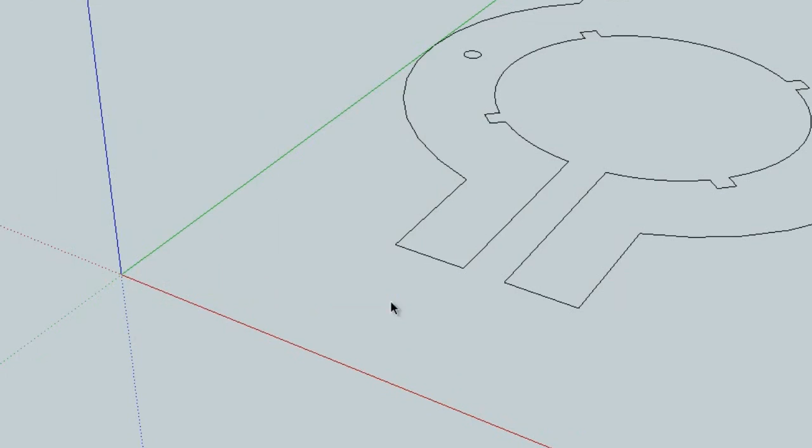Alright, so this is the mount. This is the bottom router mount, and this is the vacuum mount that we have. So I'm going to convert this into 3D, so let me see if I can do this a little bit easier.

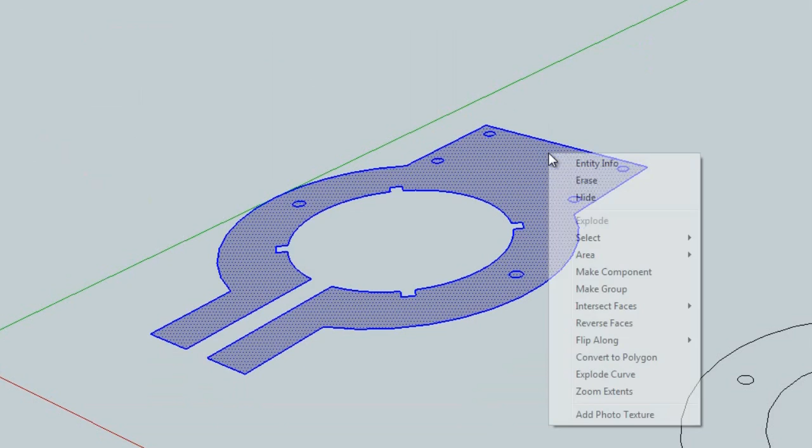I'm going to intersect everything in here. Selection, so I should have these as separate. Okay, so I'm going to erase these little inside things, because these are holes that go all the way through, right? Mm-hmm.

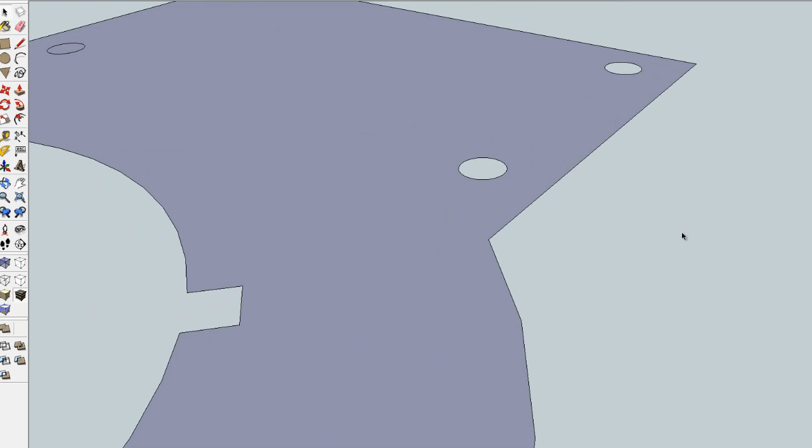And then how thick is the wood? 3/4. Okay, so what we're going to do is we're going to make this 3/4 inch, right?

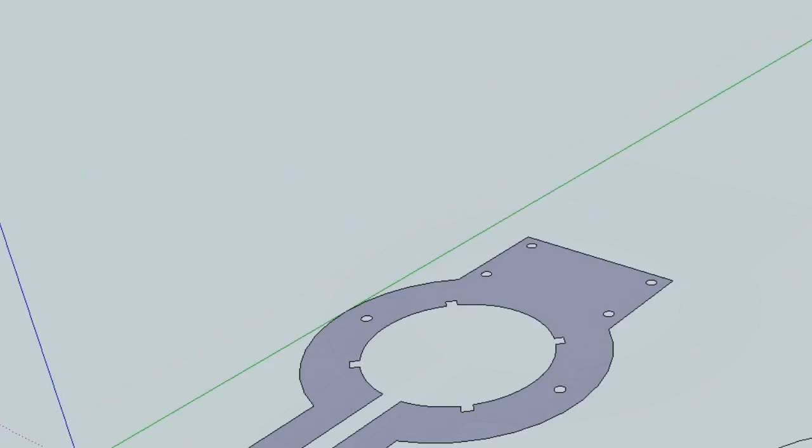Uh-oh, we have an issue with scale here. So what we need to do is we need to scale. So we're going to go 1/12, 0.083333, 3 repeating. It looks a little small, but we'll find out.

So let's go 3/4, 0.75. Yep, that's the correct scale.

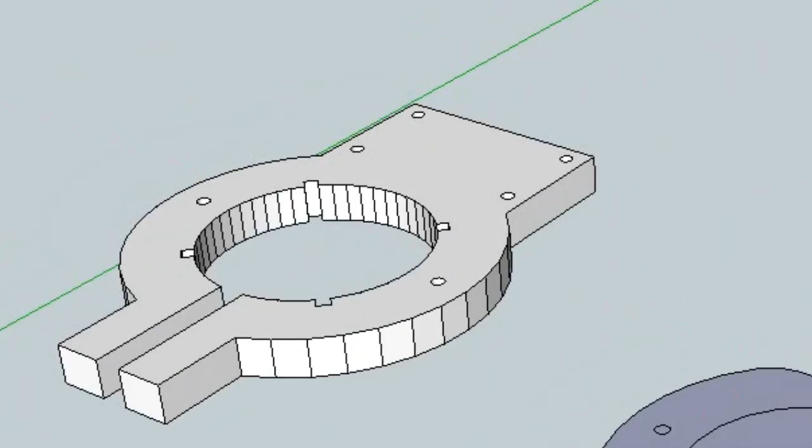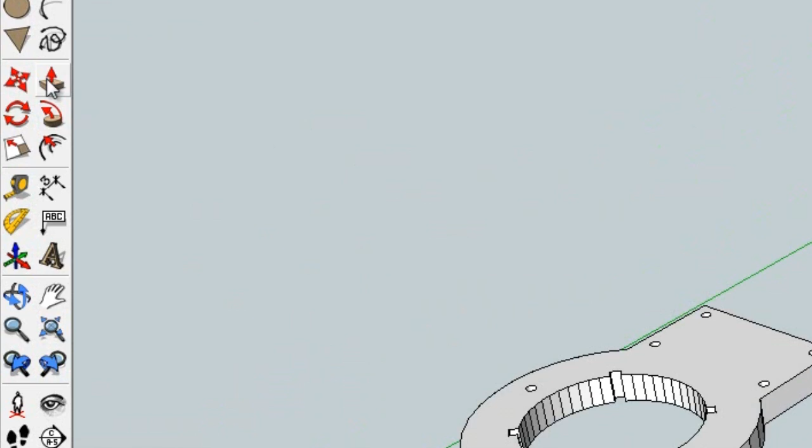Okay, so we need to do the same thing with this one. What I usually do is when I just do one line here, it seems to work, but I could have just created a large plane around it. So let me cut out the hole, but I need to intersect everything that's inside of it. Intersect with the selection. Cut out that hole, this hole, and this hole. And then I'm going to extrude it up 0.75, which is 3/4.

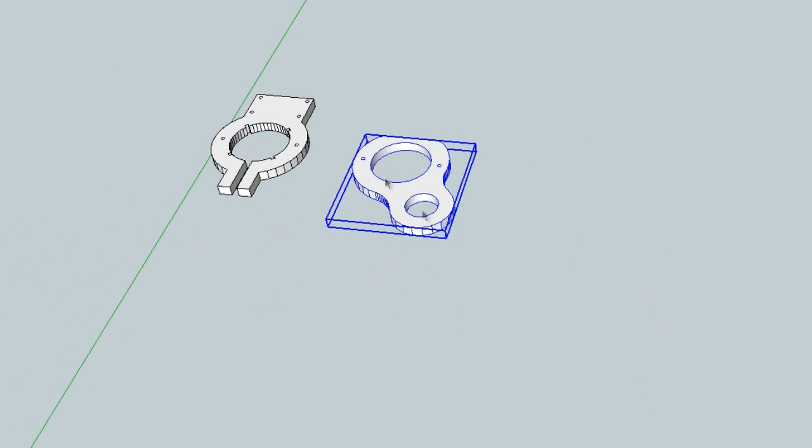Okay, so now we have, I'm going to make these into groups. Make a group. Okay. And this is a group as well. So now we can essentially modify things.

Alright, then we're going to create the router inside. Okay, but we're only going to go make a cylinder that goes 0.75 inches below. Yeah. Okay, so...

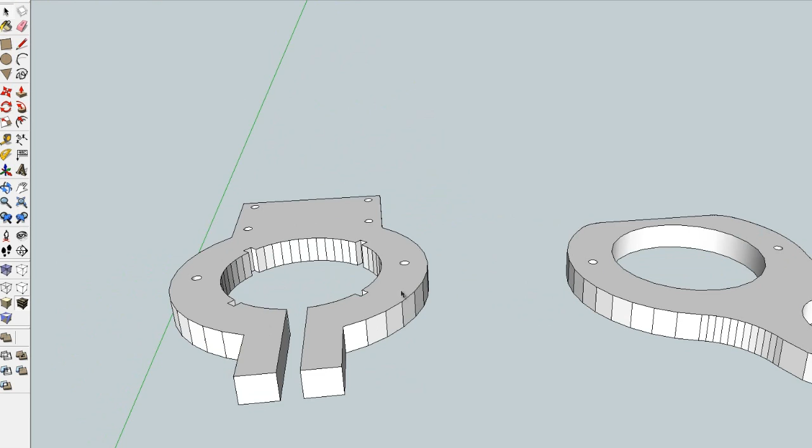Let's move this on top like it should be. We're going to move it. So this hole down here meets with the other hole, right? Mm-hmm. There we go.

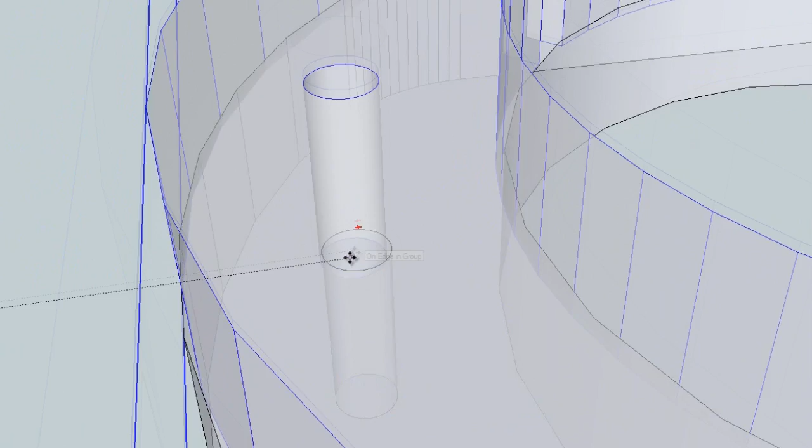Okay, so now we have the configuration, right? Mm-hmm. Look right? Correct? Yes. Yeah? Okay, so this is what it looks like in real life.

So let's create a cylinder about the size of this circle here, if I can find the center of it. Center. There we go. Okay, so I should... where is the center in space? Okay, good. Okay, now we've created a circle.

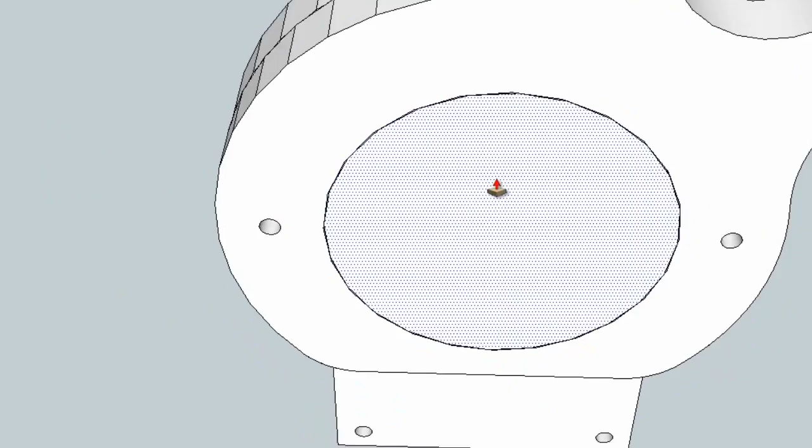We can drag it down 0.75. Oh, but it was from the other one, wasn't it? Right? Mm-hmm. So let's move this up, let's make it a group. Move it up 0.75. Okay, so that's essentially the clearance.

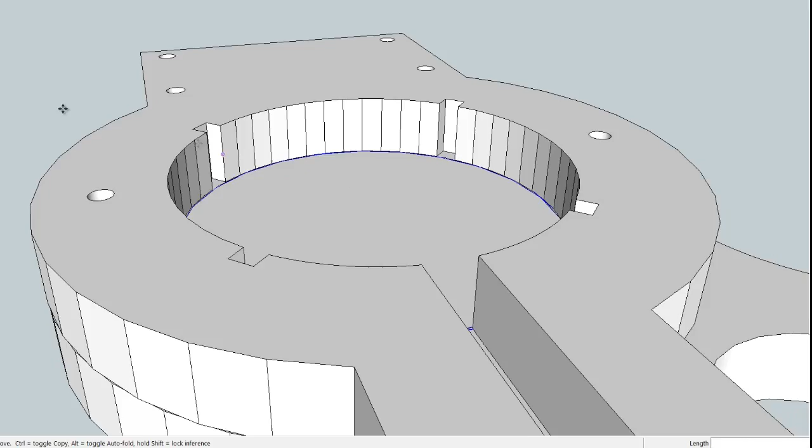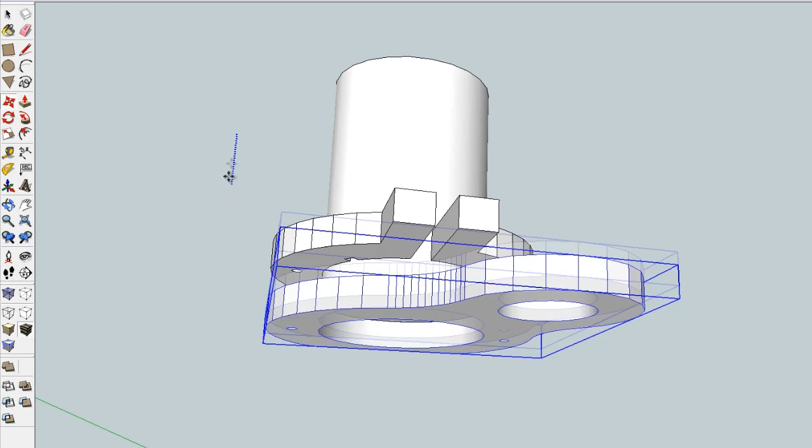Right. So when we put it up here, we really are at the edge of the bottom of the router, right? So let's escape and put it back the way it was. Alright, so now we need to put another piece on the bottom of this, right?

Okay, so, but we need to make that piece. We can't make the piece flat against the bottom of the router, right? We don't want to do that. What do we want to do? We want to make that piece a little bit farther away, right? Yes. Alright, now how far down?

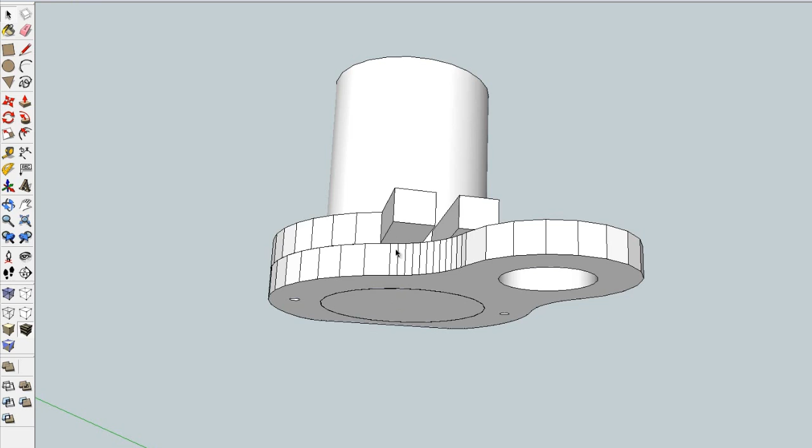We have a 3/4 inch piece of wood. Do you think maybe half of an inch would be enough area? Yeah. Okay, how long is the router? I mean the router with the nut and all that.

Oh, the nut doesn't really matter. You mean the collet? The collet. We're probably going to make a hole for the collet to go through. Yeah, that's what I was thinking. Yeah, what's the size of the collet? Let's figure that out. The nut, not the collet. The collet nut, right. We need the size of the nut.

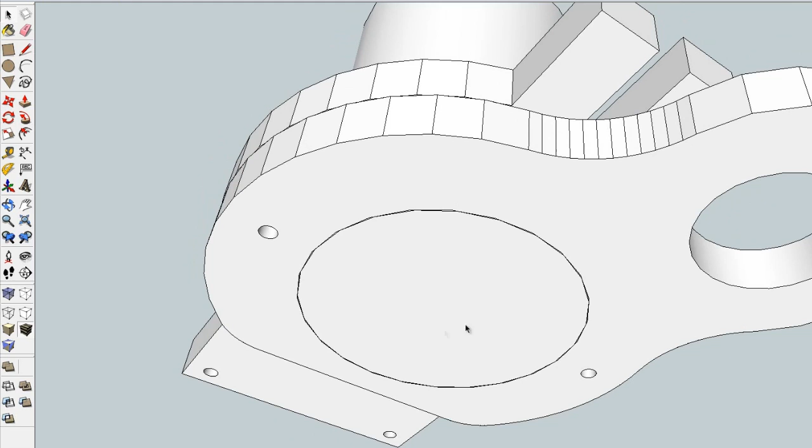So let's figure out the size of the nut. The size of the collet is 1.18, but we're going to want some space there, so we'll make it 1.25. Let's create a circle in the center of this.

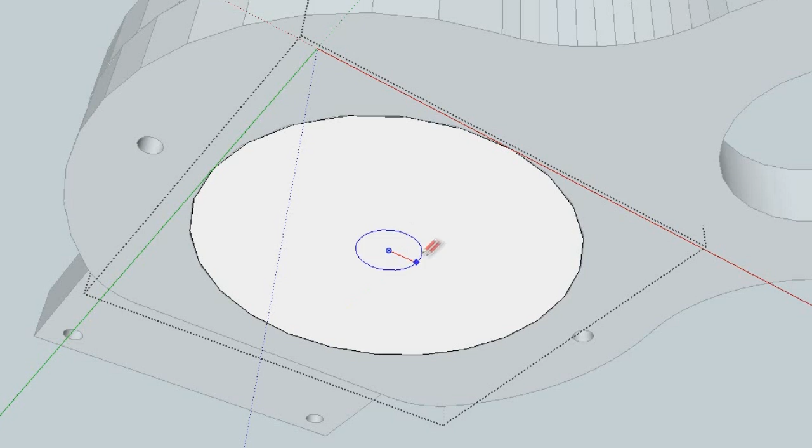Oh wait, we want to make it a part of that other piece. Let's find the center. There we go. Okay, the radius would be half of the diameter. So what is the radius of a diameter of 1.25? You just divide that by 2. 0.625.

0.625. Okay, now we're going to drag that down. Let's just take it down. It doesn't really matter because that's our constraint, really.

Okay, so we have the router and we have a collet coming out of the router. Now we need to make that bottom piece. Let's just make another piece like this one, but it's going to be like 2 cylinders. First we need to clear the collet, right?

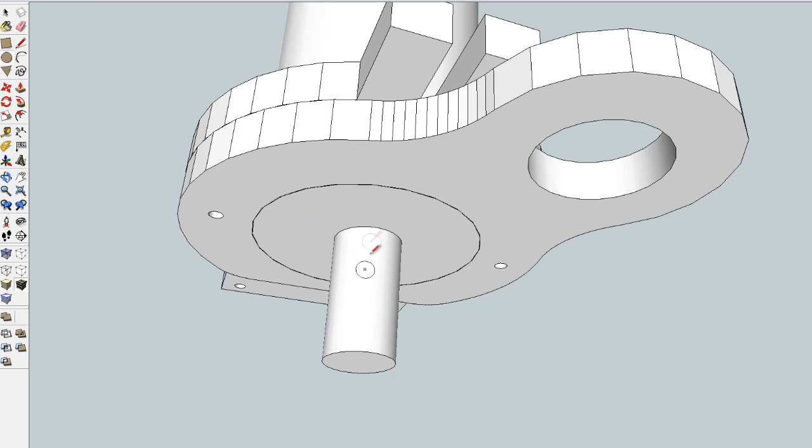So let's go ahead and make a... okay, this might be at the center. Okay, so we're going to make that, that's going to be essentially our hole, and then we're going to create another one, which is the major outside, all the way out here. We're going to have to cut this out because that will conflict with the z-axis, right?

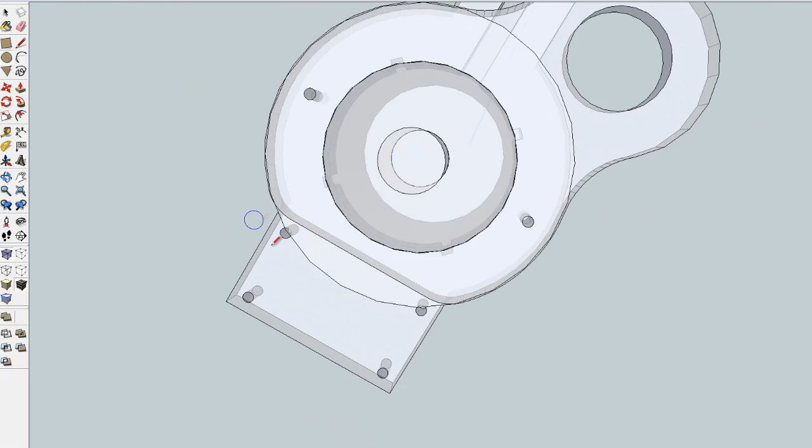All right, now what we can do is make our router disappear. We're going to hide that. We don't really need this anymore because we're not going to be designing anything with that. We can take the hole out of this because we need that clear, right?

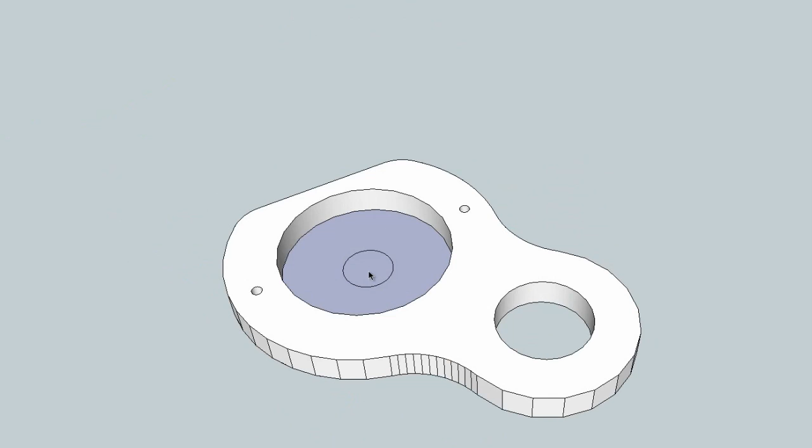And then we know that this is going to be 3/4 of an inch because that's what we use. 3/4 of an inch. But let's go ahead and make a line here, and we'll connect that to the...

So we have that. So let's eliminate this for right now. We don't really need to work with that at the moment. This is the piece we need to play with.

Right, now we can eliminate this because that's where we conflict with the z-axis, and we can round it out and do the pretty stuff later. All right, now we're going to make this thicker, 3/4 of an inch. So 0.75.

So now we have the basis of what we're going to be using to try to eliminate the downward force. Now, what I would like to see is, first we actually need to find out where those holes are going to be so we can mount it, use it for mounting.

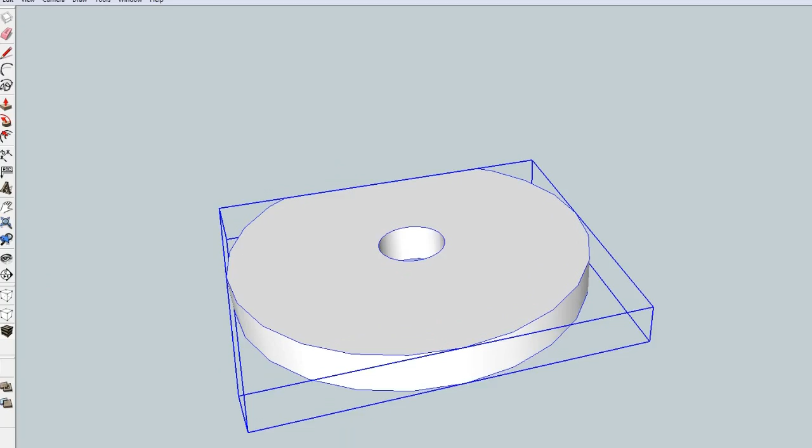So let's bring back that other piece. Group first, I'm going to make the group here so it can be a group. Okay, I'm going to rename the router, or rename this to router because that's what it's called.

So pretend router, this one is the piece that we need. And this is the, let's call it vacuum top 1, or vacuum top.

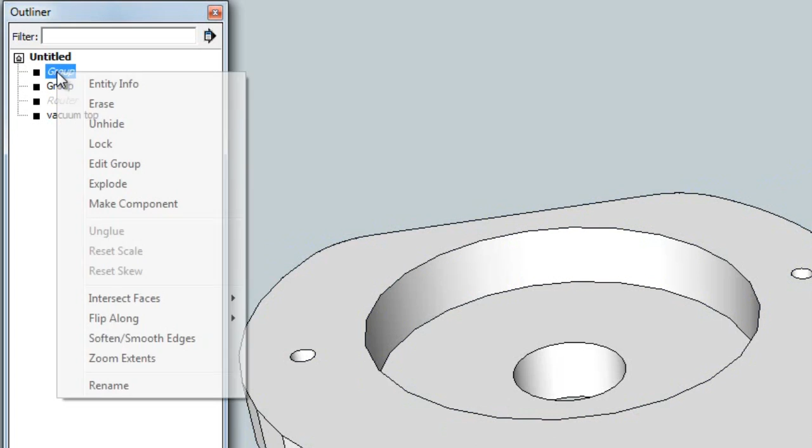And then this one is the router mount, so let's call this router mount. Mount bottom. Okay, and this one is the vacuum mount bottom.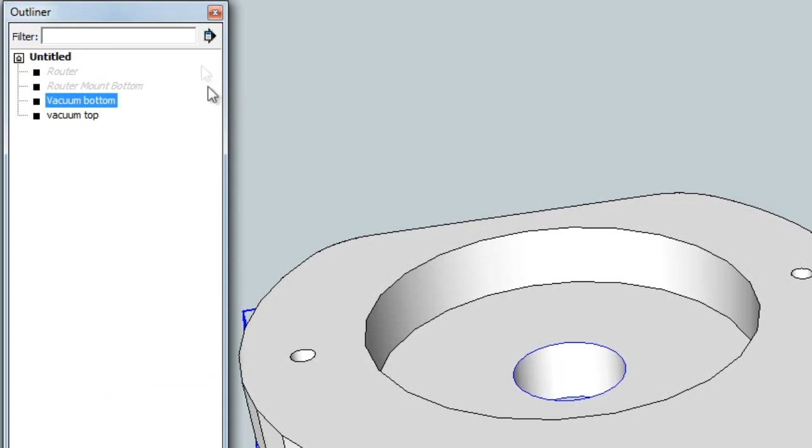Alright, so let's take this away for now and let's play with this. So we know that air is just going to hit the bottom of this and not go anywhere, and then the router will overheat, right? Because it just doesn't give you any place for the air to go.

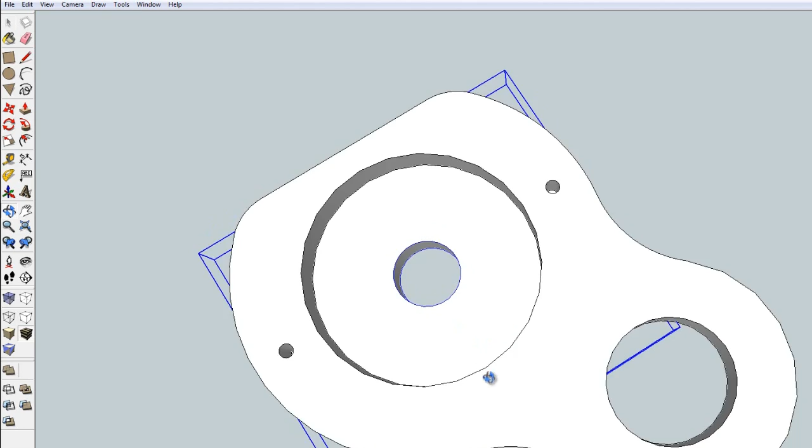So what we need to do is we really need to create a circle here, right? And depress this part, correct? What do you think? Yeah. Depress it down, make it farther down. Alright, so let's draw another circle.

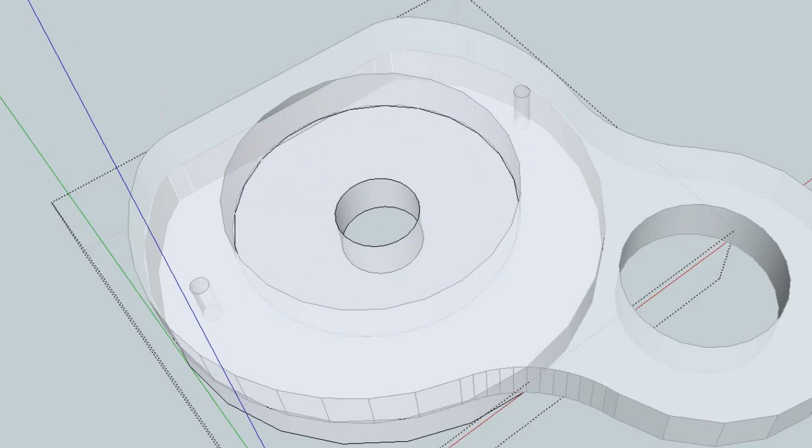We should have been in this group. Alright, let's make everything transparent. Okay, so we're going to center of the circle, okay. Then we're going to hit this point here. This is the size of the router. And then we're going to depress this area.

And I don't know, I'm thinking about going like 0.5. Let's see what half an inch looks like, because we still need to maintain some material here, right? Alright, so this gives us half an inch of area to be able to stop the airflow going down, right?

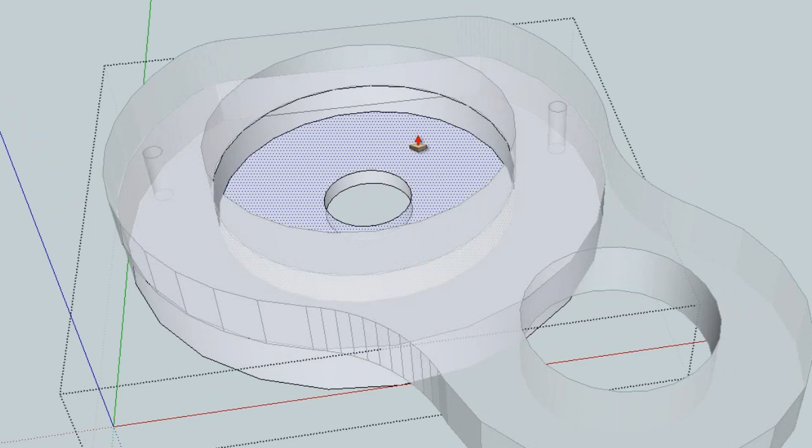Okay, so what do we want to do? Now we want to create a place for the airflow to go, right? Yeah. Okay, so how can we do that? By placing slots. Let's raise this piece a little bit, just so we can see this in another plane and we can play with it. Okay, so now we can see what this piece looks like, this bottom piece, right?

Yeah. So what do, do we create pathways? Yeah. Alright, and how would you create these pathways? Radially? I would start from the center here and maybe go out to the edge. But wait, we have to figure out where the hole is going to be.

Where the screws, right? Yeah. So what we need to do is, I'm going to lower this. This is going to be easier to understand if I just lower this.

Okay, I'm going to put the screw holes using the transparency. So what we need to do is select this one and be in it. I can still see it a little bit.

Okay, we've created one. Now we're going to create the other one. Okay, so now we have two holes. We can...

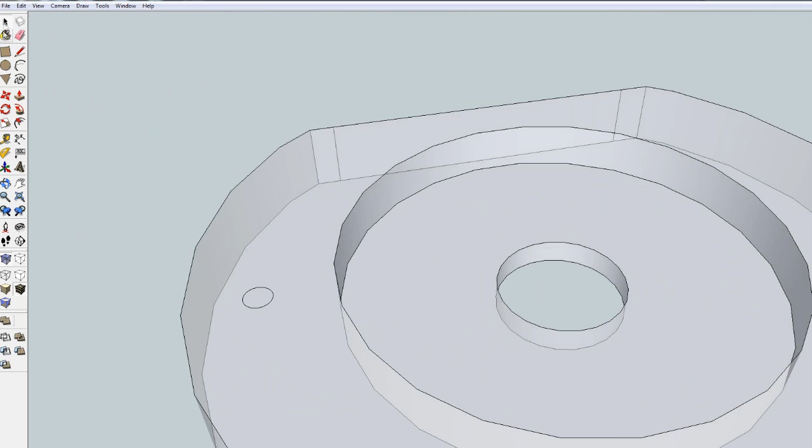Delete them. What I want to do, just to make it a little bit more clear, I'm going to hide this just for now. Now I'm going to push that in. Using the push-pull, first I'm going to be in this. We want to push it in 3/4 of an inch. But I'm going to just use the existing edge to determine that.

And that's not correct, because I didn't use the outer edge. There. Now that goes all the way through.

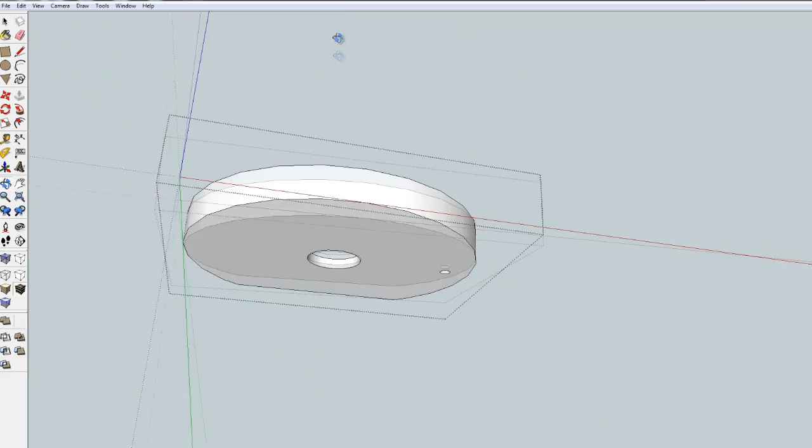Let's get it out of transparency mode and see if that is true. Nope, one didn't go all the way through, so let's see why. The one on the left. All the way down to the edge.

Yeah, okay, good. So now I have these two. This is a good design here.

So now, to allow air to go through, what we want to do is maybe create some passageways to come out, right? Yes, allow it to escape, the air to escape. We don't want to do it here because this is where the z-axis is, so we really don't want to mess with this part.

So we're going to create radial areas. Cool, you see here? Actually, I was thinking, why not do it right here, and then going over here? Oh, I'm going to do a whole bunch of them.

Yeah, I think I'm going to have one here, close to this hole, close to here. And I'm going to go in front of the hole. In fact, you know what I'm going to do? This is just my design phase.

I'm going to continue my design in AutoCAD so I can get everything ready to CNC right away. So this was just a design. I think we have a good idea of what we want to do, right?

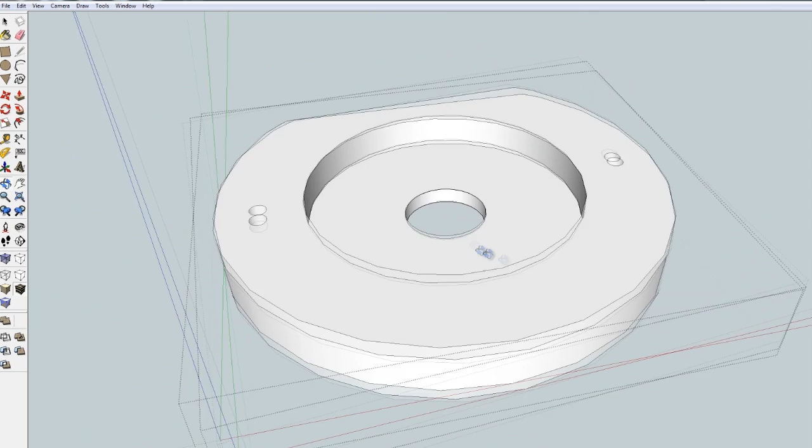Yeah, so we know what we want to do. I'm going to construct it real quick in AutoCAD. We don't need that anymore.

But we also want to do something else to the other piece, the piece just on top, the vacuum top. We want to create passageways for that too in the same locations, because we can take advantage of even more airflow coming out.

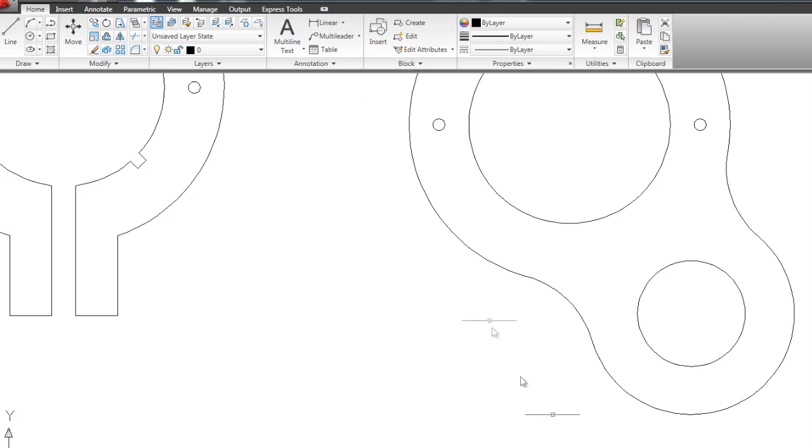And we just went to mount. Okay, so let's use that. All right, so we know that I can just take this and copy it, and make another one, and a circle.

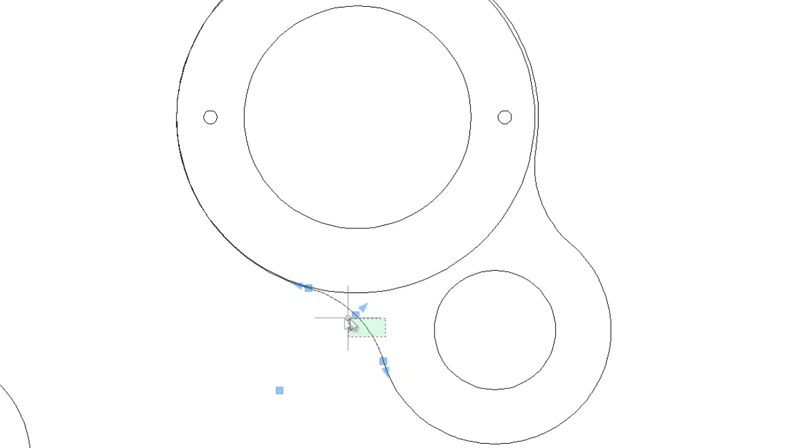And I'm just going to explode this. And that circle didn't work. That's alright, because what I can do is...

Go all the way around, just extend this all the way around. All right, so we pretty much have this now. The collet size was diameter 1.25.

That's the hole we want to make in the center, so the collet will have free spin in there. And we still have this, which is good.

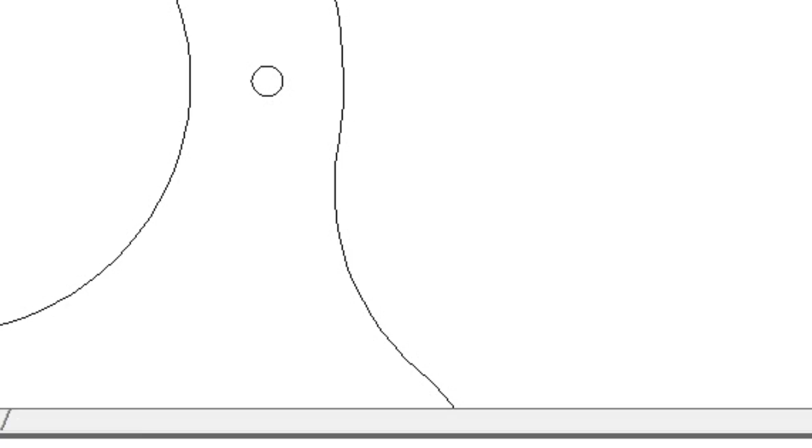So what we want to do is create radial. I'm going to go ahead and go as close as I can to the edge. And what I'm going to do is mirror this all over the place.

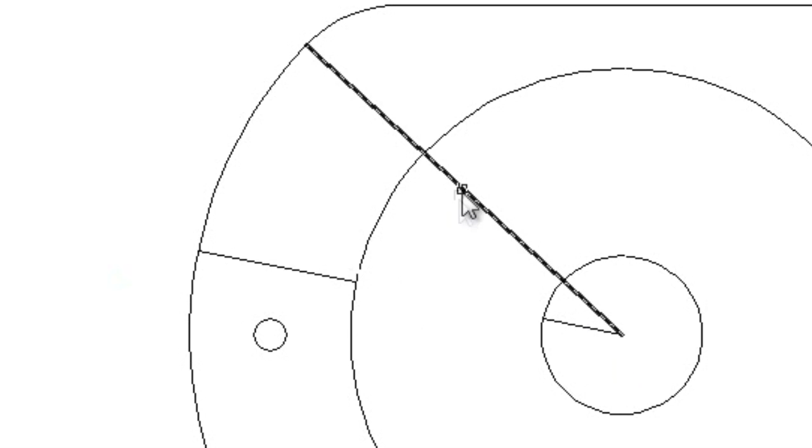So what I've done is I've created an area that I'm going to cut out, which will be on the same plane as this, right? So what we could do is actually do this. And that's the way it's going to look, right?

So let me mirror this to the other side, so we can have it going over here too.

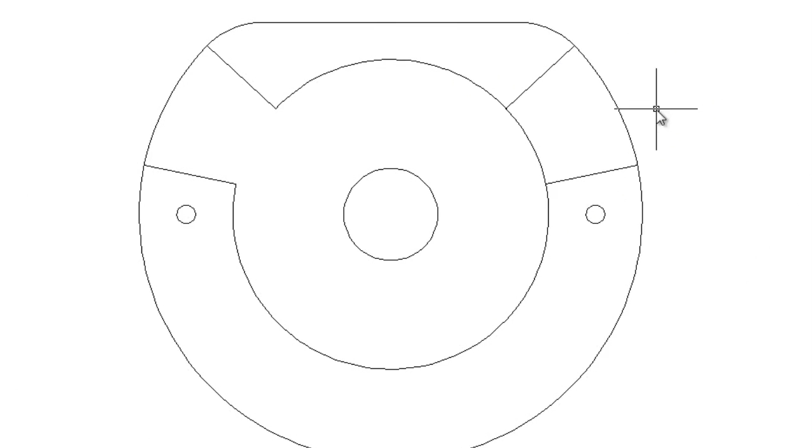All right, and then we're going to do the same thing. I can mirror both of them at the same time, actually. Mirror. We're going to do it like that.

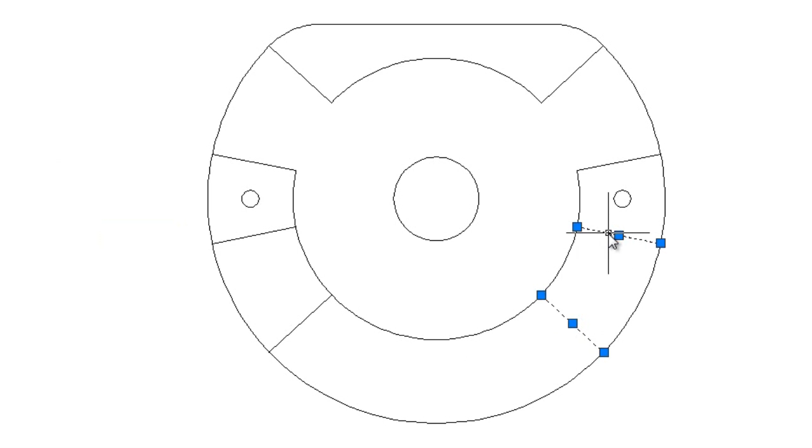And then we're going to create one more, I think. Mirror. I don't know if this is going to work to my advantage here.

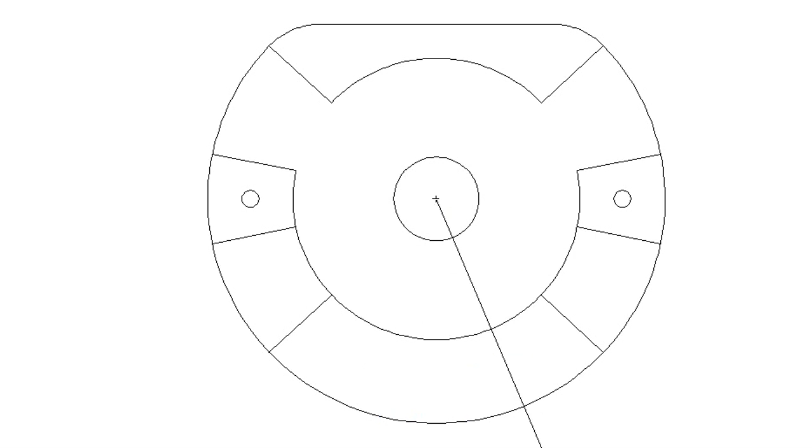No, so what I'm going to have to do is just create another one, actually, because I can take advantage of some space here. There. There we go.

Get rid of these, and then this is what the part will look like. Now we have to modify this one as well. So I'm going to mirror this because we're going to be routing on actually the bottom of it.

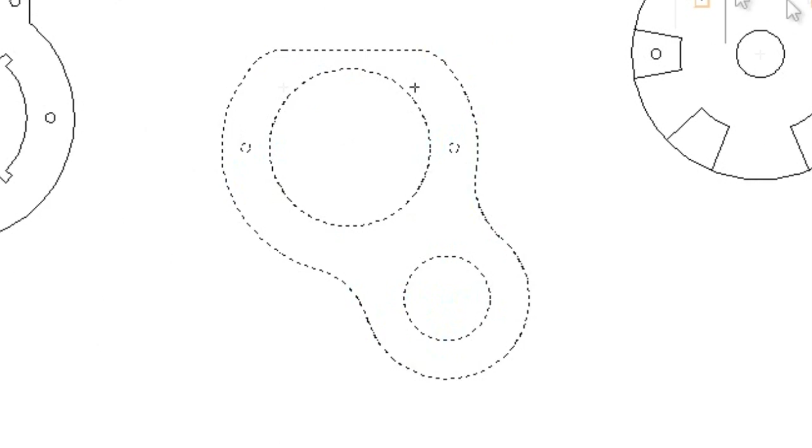So this is what we're going to be pocketing. We're going to be pocketing on the bottom of this piece, pocketing on the top of this piece, and pocketing it on the bottom of this piece too. It'll be a very interesting looking piece, this thing.

I wonder if we could even eliminate all of this too. We may not even need that. I'll keep it. No, I'll keep it. Yeah, I mean, we really only need these two solid pieces, and everything else can be essentially open. Yeah, pretty much, you know? Huh, you can make a complete circle if you want.

It may be more interesting looking if I actually make it like this. So let's see, and maybe we can take advantage of even more refined control of the blower output later on. So we'll just keep it like this for now.

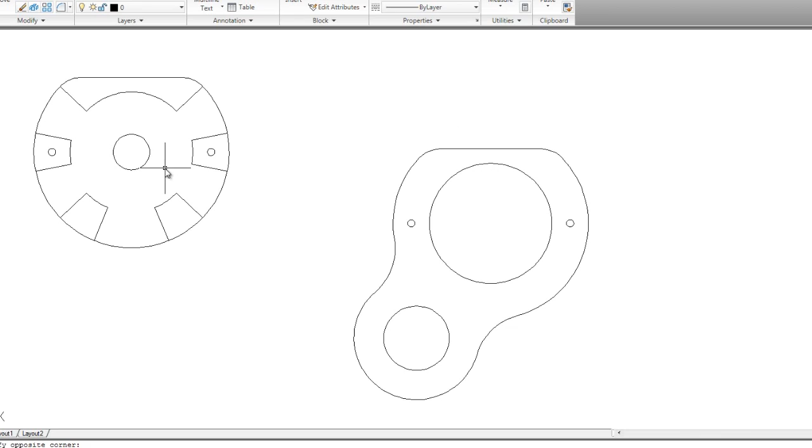All right, but we want to make this the same. So let's just take these lines, we're going to copy it over. It's already there, let's see. But if we have any difference, like okay.

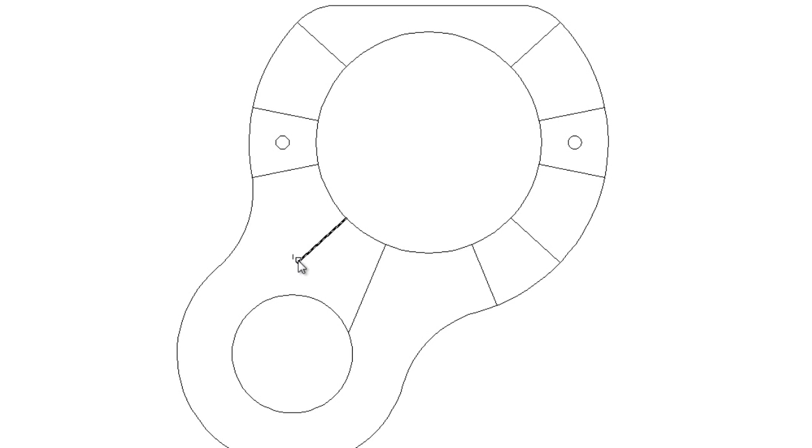All right, so what we could do, actually, we're going to extend this. We don't actually need, you know what, we don't want these to be there. So that means we're going to eliminate this one.

Wait, no wait, that's wrong. Because it's this area that's being exhaust. So it's this area that we want to get out.

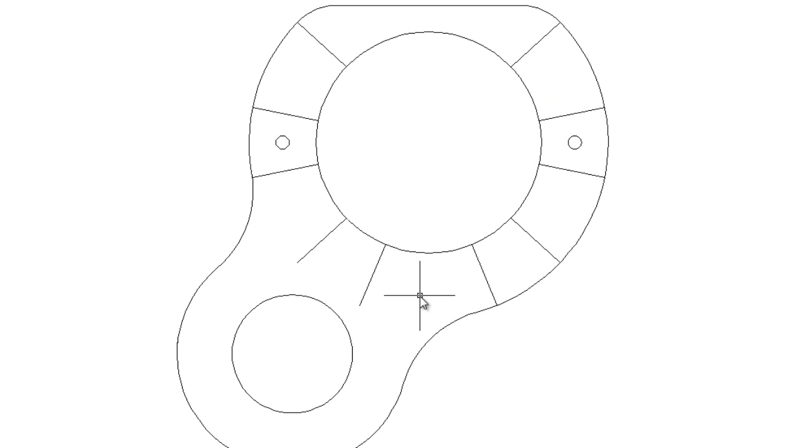So we're going to have to pocket this part, pocket this part, pocket this part, and pocket this part, and also pocket this part. But I'm not really sure if we want to pocket this part. So I may actually take this part out and take this part out.

Alright, so we're pocketing 3 areas. So I'm going to take this out to here. I'm going to put that back. And I'm going to eliminate this part. Okay, so now it has this area to escape, this area to escape, and this area to escape.

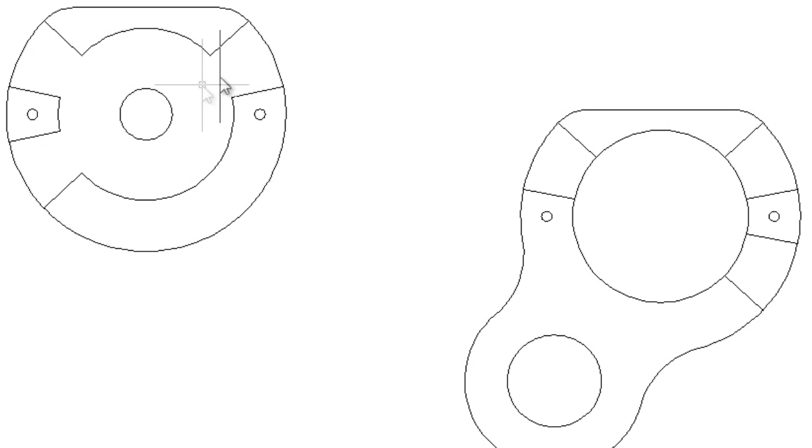We'll maintain that, so we're done. All we need to do now is to put this in a CAM program and cut it out. So I need to create this as a DXF, which I already have.

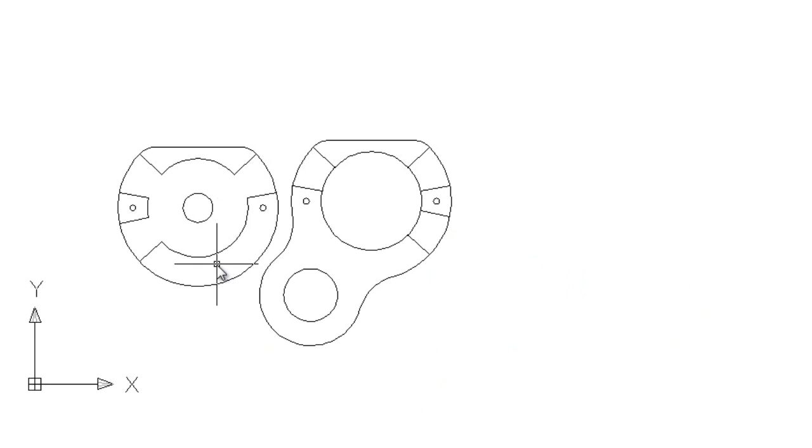I'm going to move these closer together so I'm not wasting too much material, like that. Yeah, that's good. And then we want to make sure that the holding tabs are somewhere that there's tall material, not material down here like this, so we can easily get rid of those.

We also want to create boundaries for the pockets, so use the BO command, click there. Now we have a polyline here, and we need to cut it out there. We need to pocket this out. We need to drill this out, and drill this out, and drill this out.

Now this one I need to pocket this, so I'm going to make this a boundary. BO, this one, this one. So these are going to be pocketed, right? And then you're going to cut this hole out and cut this hole out. Okay? Mm-hmm. So now we are ready.

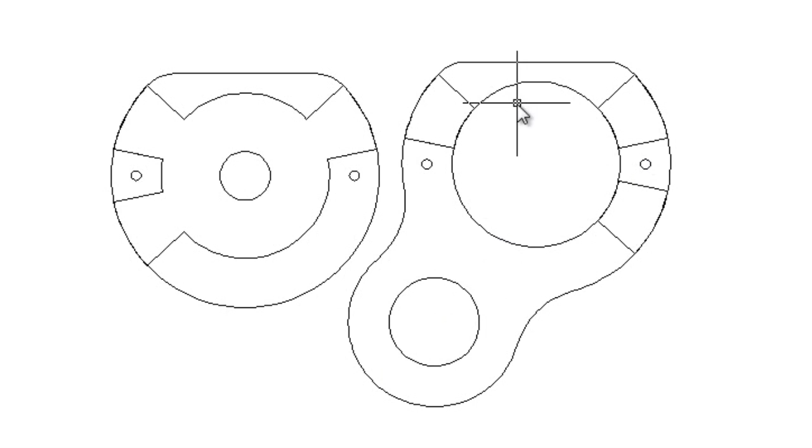I'm going to get it closer to the origin here. Okay, so now we're ready to put it into CamBam. I want to get rid of some of the, I'm going to go up 10.

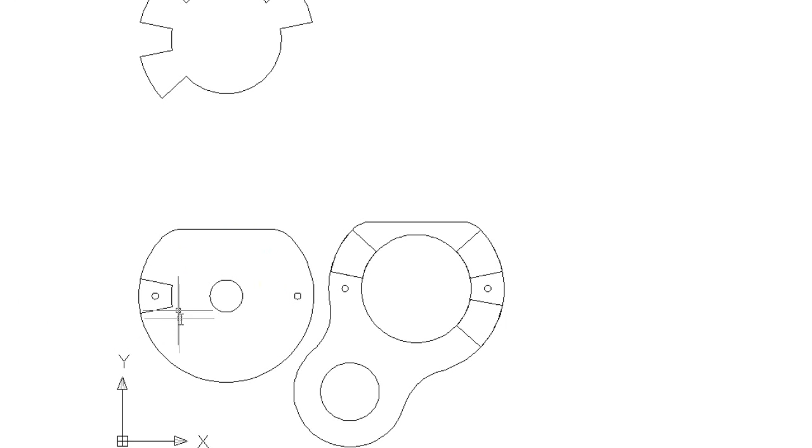Get rid of some of these lines that we don't really need. We want to maintain just polygonal type stuff. And I can do a p-edit, join all of these. So this is a polygon, this is a polygon.

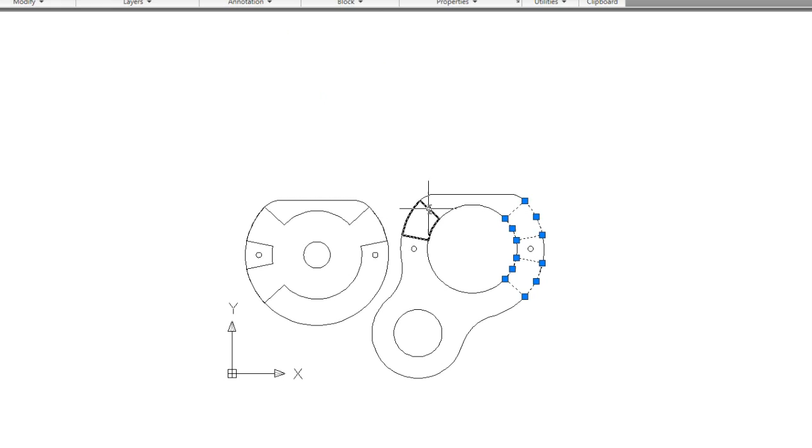Move this back down. Okay, now this is a polygon already. These are. This is a polygon. And move this up about 10.

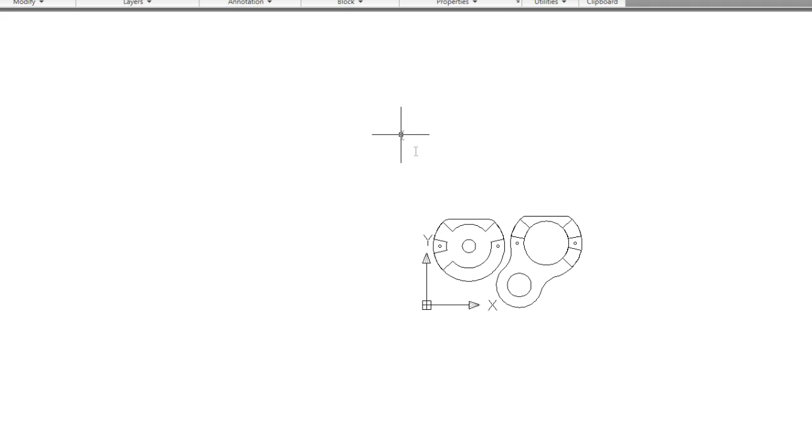We can take this out. We can take these out. This out, this out, this out. Alright, now we're going to bring it back down 10. And then we're going to take this into CamBam.

So let's save this as a DXF. Save as... DXF, called mount DXF, that's fine. Replace it, sure.

Exit. No, I don't want to turn it into a DWG. No, I don't want to save drawing 1 because that's blank. Now go into CamBam and we can load it up and create the toolpaths that we need for the machine to follow.

Alright, so we're going to File, we're going to open up the mount. Open the mount. This is in the wrong directory. Let's go 4x8, I think it's in here yet. Okay, so we have these. Looks like I went a little bit over the edge here, so let's move it.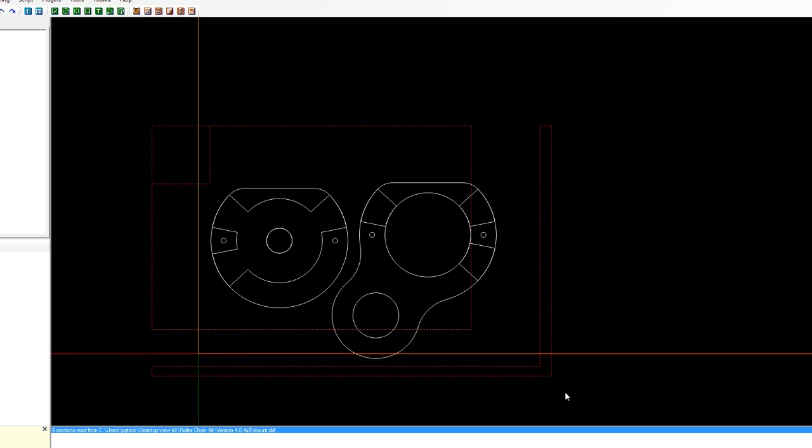Control M for move. Oh, control M, oh, I can't do it, that's weird. I think it could be the capture program that I'm using. Transform, move, okay. Yeah, okay, let's go a little bit farther from the edge just in case we don't know where we are.

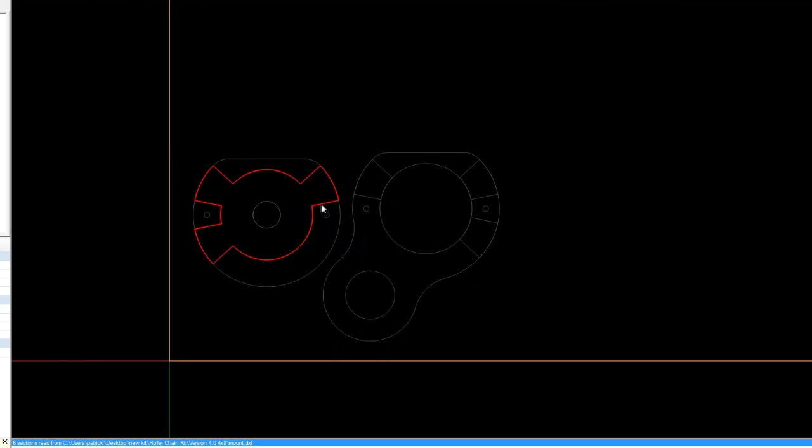Okay, so first I want to drill this hole. Oh no, pocket better, because let's pocket this stuff out first. So let's do a pocket. Actually, hold on, I need to determine my stock.

My stock should be 0.81. I'm going to go here to machining. My stock, it says 0.75, but I like to go a little bit deeper, so 0.81. You can see that increased a little bit.

Now I'm going to use my cam styles. I'm going to select this piece because I want to pocket that out first. This is the first thing the machine is going to do. I use the pocket command, then go to style. I've already created a style for pocketing at 0.45.

So let's go here, let's go 0.5. Let's just go ahead and go all the way. 0.5 pocket depth, target depth is 0.5.

Then I'm going to want to drill this out, so I'm going to use the drill command. What is this size anyway? Diameter 0.125, 1.25. Let me see if it did. Yeah, it's doing a good drill. So I'll go ahead and maintain that.

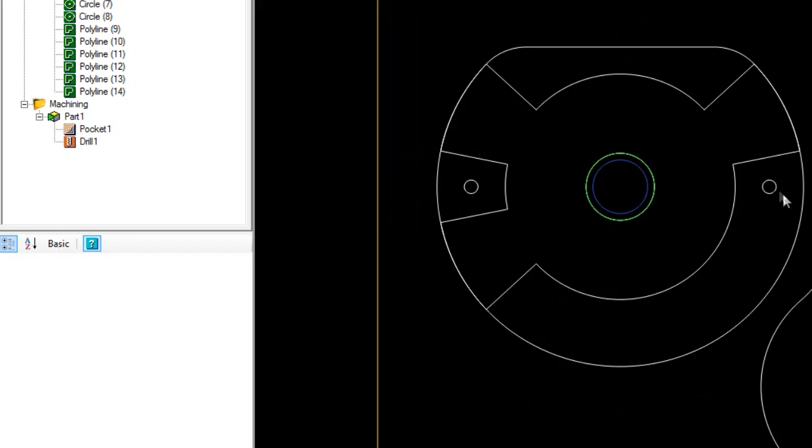I don't have to add a style to that. We're going to do a straight drill to these. So drill down straight, use the drill command, selected those, style, I'm going to drill straight.

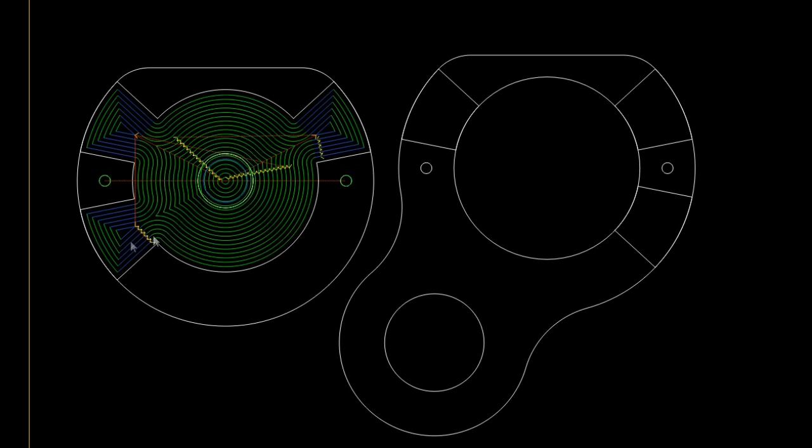Okay, that's fine. And now, so we've pocketed. I'm going to use Control T to show what we're doing so far. Alright, now all we need to do is cut out the entire piece.

So let's go ahead and press Profile. Style is my favorite style of profile with tabs. Alright, now these are the tab locations.

I can put one here. This is going to be fine. We want the tabs at the upper locations, which are this area, this area, this area. And it's good to have one, like sort of - this is going to be a little tiny piece here that could pop up and jam our end mill, so we want to keep that piece down.

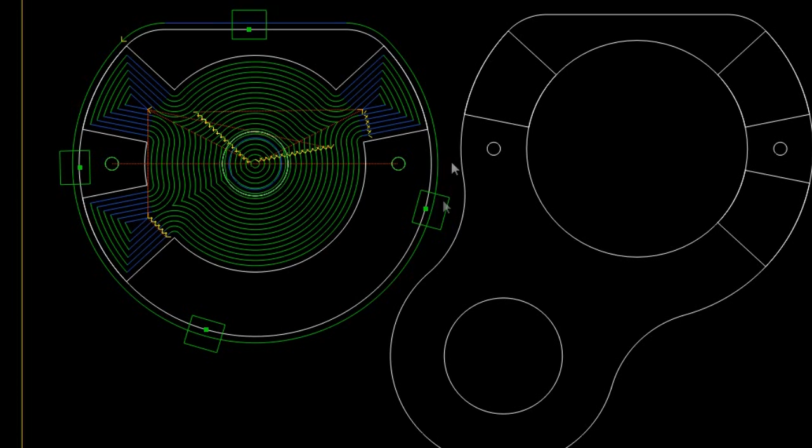So let's go ahead and drill these next. Drill it, it's going to be a straight drill. Alright, that's fine. And we're going to pocket this one.

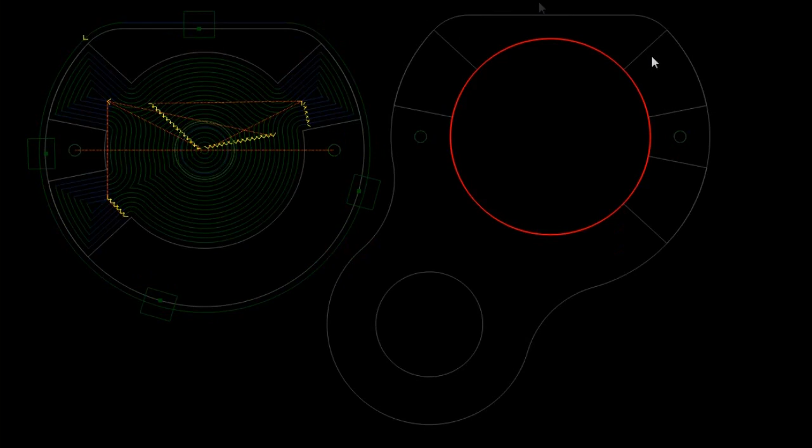But no, let's go ahead - we're going to do an inside profile to this large circle. We're not going to do a drill, because if we do a drill, this big piece is going to pop up and it could jam the CNC machine between the shank of the bit and the other wood around it. So we're going to do an inside profile with some tabs.

So let's go over here, go down to inside profile with 2 tabs, what I usually do. Let's take a look at it. Yep, and I can put it on the high points. This is a high point here, this is a high point here.

This would be a low point because it's going to be pocketing, so we don't want to put it there. That would be hard to cut out. So now we're going to do a pocket here. Let's pocket this, we're going to pocket this to, let's do it the same, 0.45.

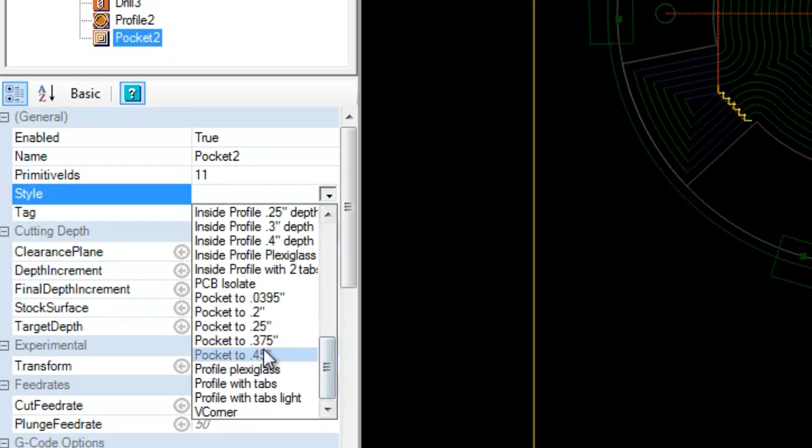And just go all the way. We don't have to go 0.5, it's not going to be necessary, it's going to be large holes. Let's do this one, 0.45, and let's do this one, pocket this one out. 0.45, alright, I can do this.

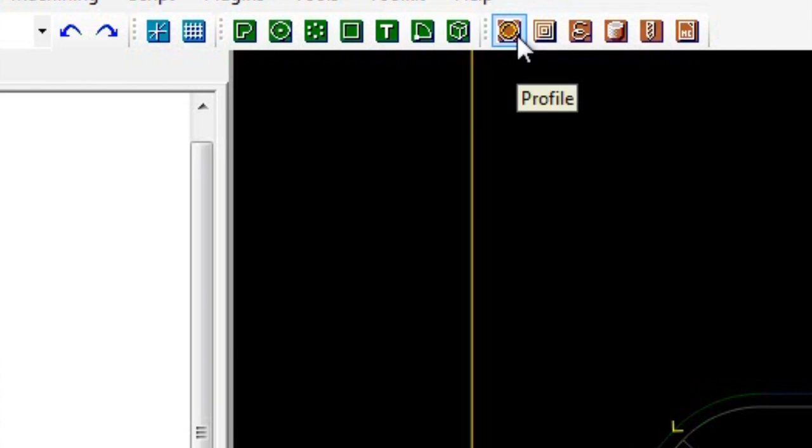And now we have another hole to drill out, so we're going to go ahead and use the inside profile because this is also a large piece that can be jammed. So let's go to inside profile with 2 tabs. And now we're ready to cut out the entire piece.

So let's do a profile with tabs. Alright, now I'm going to put this in these locations. This is good, this one is good. I'm going to put this over here.

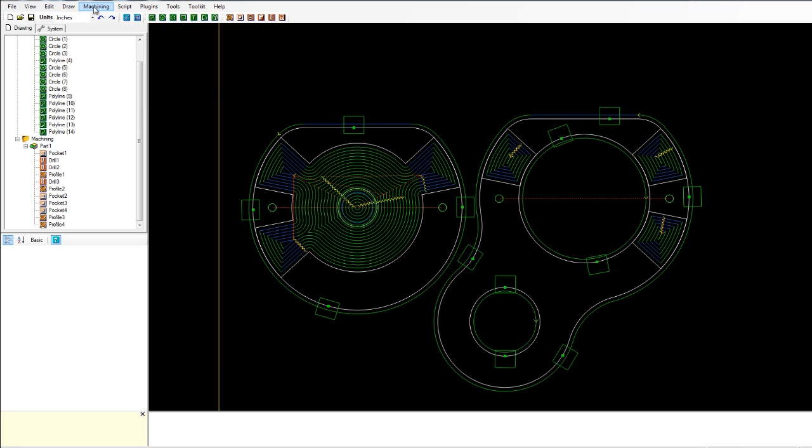Okay, so now we have created the cam and toolpaths that will eliminate the material and cut out the pieces. So I'm going to go ahead and produce G-code, and we're going to run it on the machine. There's a bunch of other things that you need to consider when making cam for the first time.

So I would suggest using the tutorials on the CamBam site. They're really good, and it gets you ready for understanding how to use it with Mach 3 and setting other parameters like bit size. Actually, let me do that because I didn't do that yet.

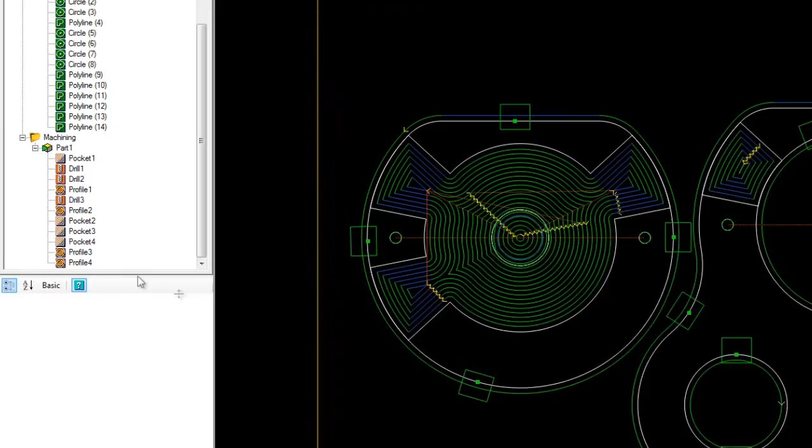Machining, I usually go here and click on 4, which is 0.25. I use a 1/4 inch bit generally. So I'm going to go ahead and machining, produce G-code, and then save it as mount.nc.

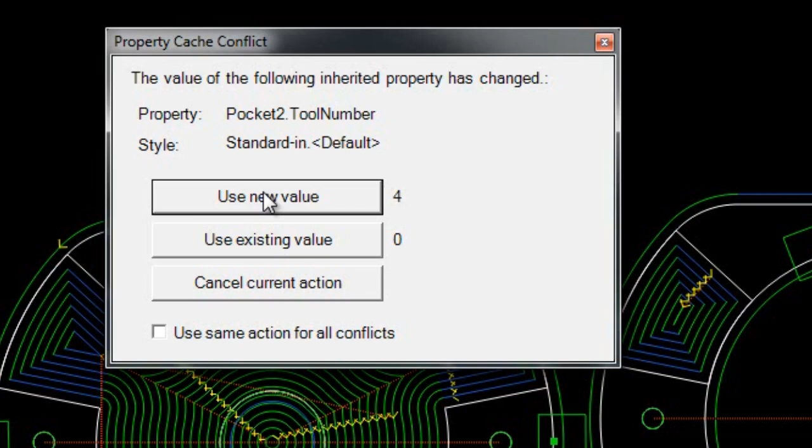Yeah, that's fine, that's fine. That's changing, this is my tool number. I just changed it, and I have to use the new value. I can do this, and now it's ready to go to the machine.

I'm going to copy this file to the computer on the machine. I'm also going to save it so we can reference it later.